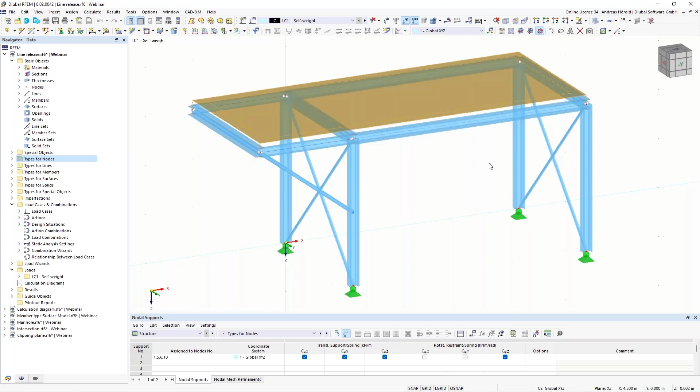When I go to the eccentricity, you can see there's an automatic offset, and I defined that the bottom of the concrete slab is at the same place as the top of the steel structure, member number 18. This is member number 18.

To see it better, I go to the navigator display, then solid model surface is now filled, including thickness. I'd like to display it without the thickness.

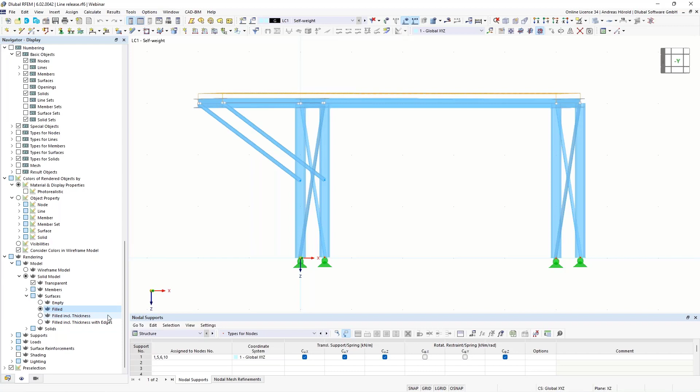So the target is that when I assign a load in that field here, this area of the slab can take off. This isn't the case at the moment.

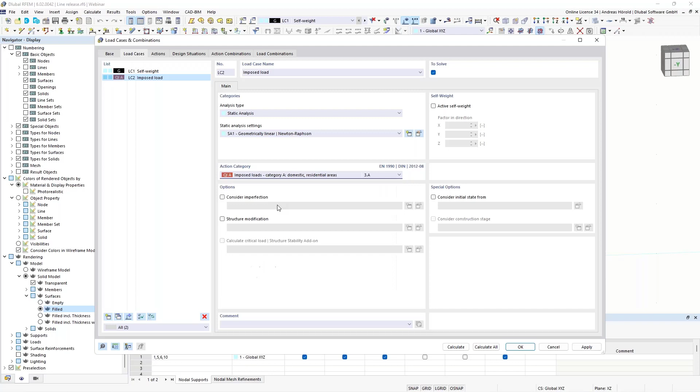Let's try that. I create a new load case imposed load, with the action category imposed loads.

Since it's a full slab here over two fields, I have to define a rectangular load. Left above, insert loads, and then free rectangular loads is the feature that I use.

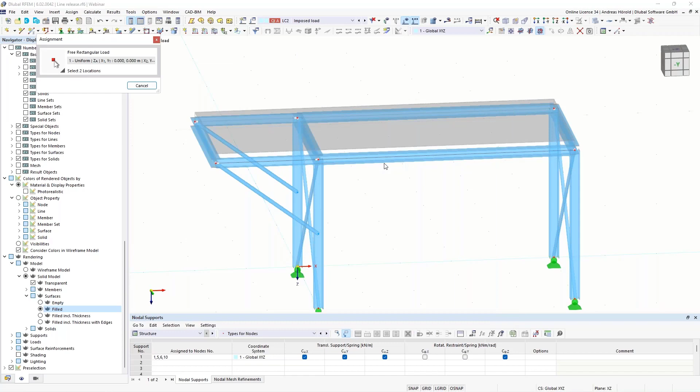So I select the slab. Then a quite high load, 20 kilonewton per square meter, and I define the edges. That's all.

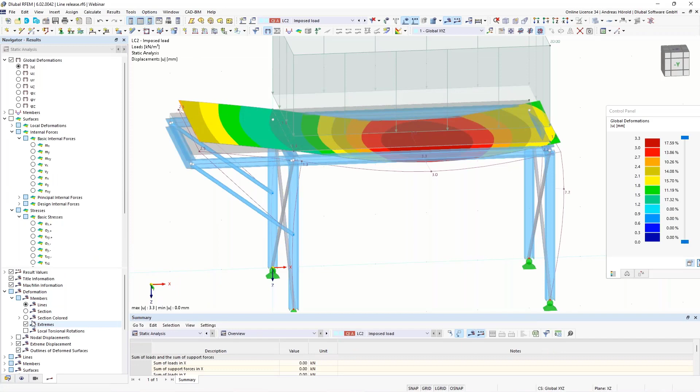So I calculate the load case, and you will see that the concrete slab can't take off. I displayed the sections colored, and you can see that the slab doesn't take off in this area.

How to do that? With a line release. So insert, special objects, and you can find the nodal releases, line releases, and surface releases here. They act the same way, and I use the line releases in this example.

I use the line releases in this example since they work simultaneously or similarly. I select the lines, all the lines into place, and I release surface number 1. It's only one surface, and I have to define the line release type.

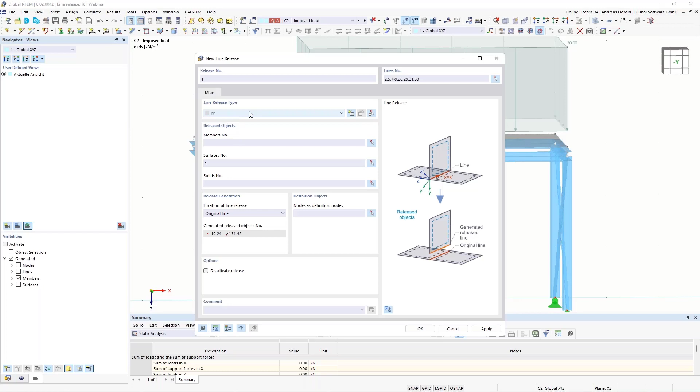In the first step, I release the z-set direction, and I use this nonlinearity, fixed if positive z-set. That means if the load is in the plus Z direction, it is fixed, but it can take off if the load is in the minus Z direction.

Let's try that. We calculate the load case again.

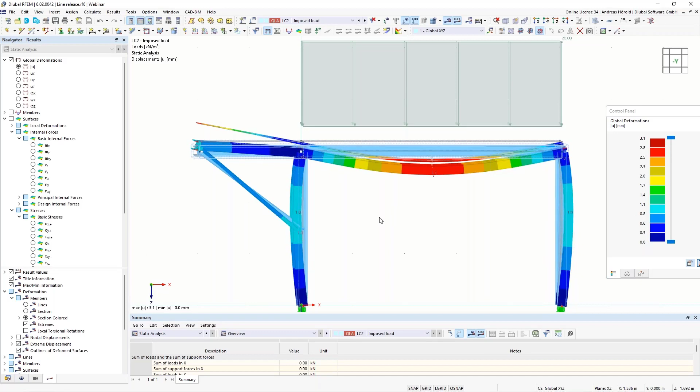So now you can see that the concrete slab takes off. But in that area, the beams act as composite beams because of the eccentricity of the concrete slab. At the moment, we have a deformation of 3.1 millimeters. And when I release the slab in direction X and Y, we will get a higher deformation. Then the concrete slab lies loosely on top of the steel structure.

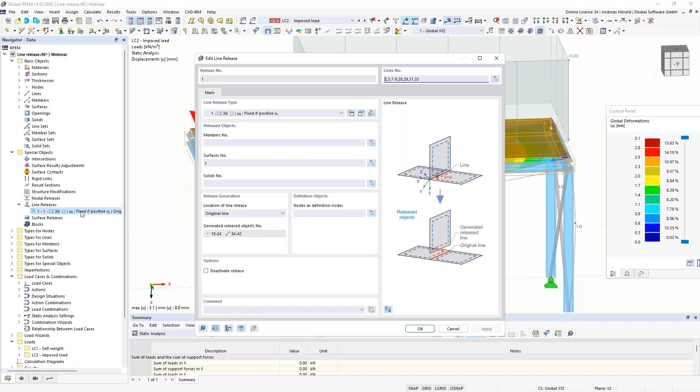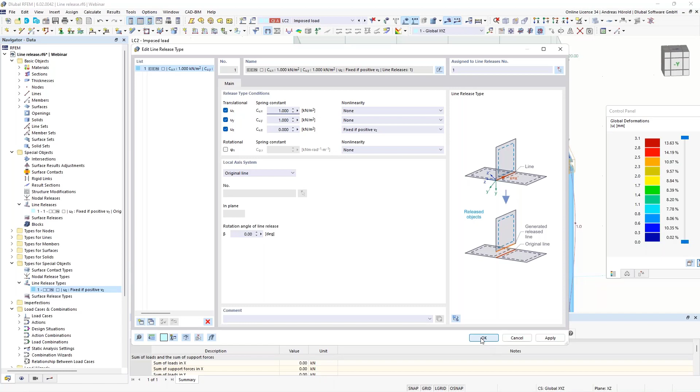So in the navigator data, under special objects, you find the line releases, and you can double click on it, or you can search for the types for special objects, and double click on the line release type, and then the same dialog opens. Then I release the concrete slab in the Y and X direction, but I have to enter a small spring so that the slab can't be moved, otherwise it would be unstable, if it were 0.

We had a deformation of 3.1 millimeters. Now they aren't composite beams anymore, and that's why we get a higher deformation of 5 millimeters.

Okay, then we turn back to the PowerPoint slide.

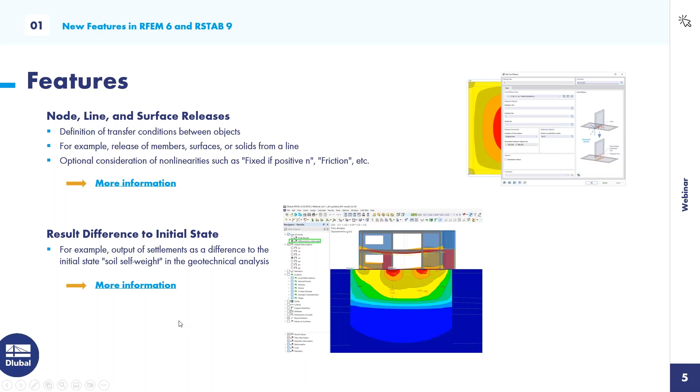Next feature, result difference to initial state. That is useful. This feature is also useful, for example, if you would like to consider the soil self-weight as an initial state in the geotechnical analysis. We showed that feature in the latest webinar about geotechnical analysis. You can find it on our website.

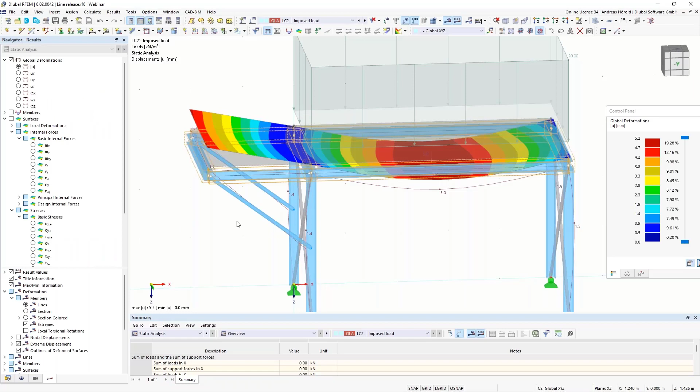So next features, small but I think good features: the zoom with window using the right mouse button, or the animation of deformations. I showed it in the program. If you click with the right mouse, then you can zoom in here. I don't use this feature because I have a scroll wheel, and I can zoom in and out with the mouse wheel.

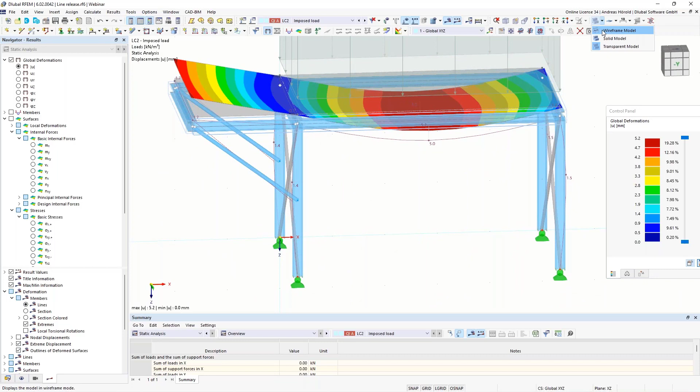I switch to the wireframe model. You can select objects by pressing, or select more than one object with the control key. I hope you see the plus on the cursor. And with the shift key, you see a minus, and you can exclude it from the selection.

So, double click on an object and you can edit it, or right click to open the context menu. And if you select anything, and press the control key, then you can copy those columns here, and without pressing the control key, you can move them via drag and drop.

Okay, that should be all for the mouse functions. Here under the load cases, you can animate the deformations, also with colored sections.

Then we turn back to the PowerPoint slides.

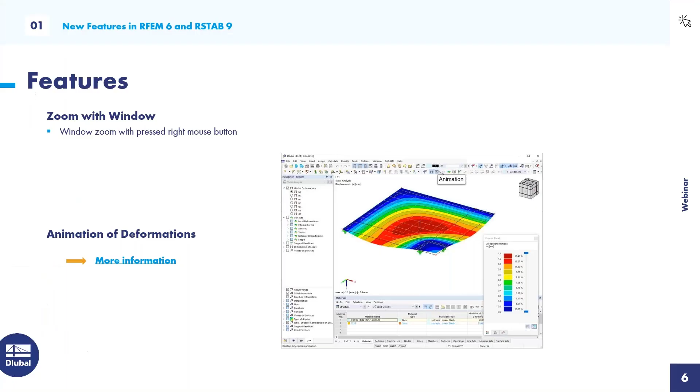Next feature, save as version. You can save different model states within a model. You can define an automatic save, and adjust the cycle. I showed it also in the program.

File, save as version. And when you open the base data, also on the left above, then you can find the register history, and you can find that saved version. I've already got some saved versions because of the German webinar. You can add comments, for example, a completed steel structure or a completed model without loads, etc.

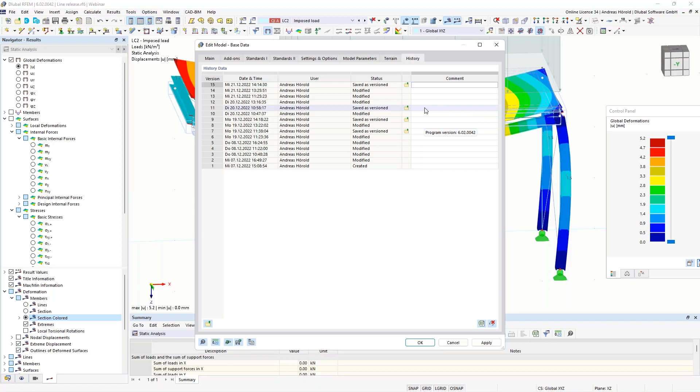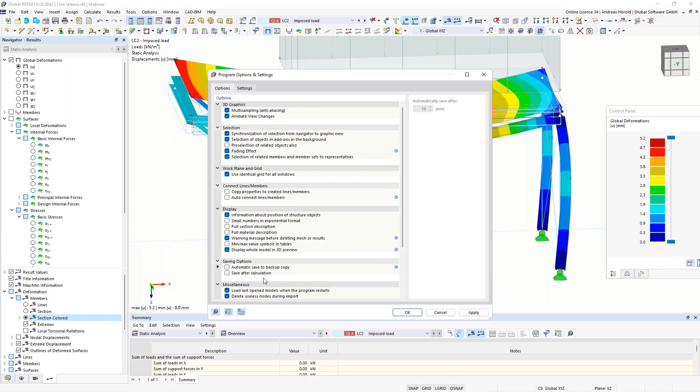Okay, and under options, above, program options, you can find the automatic save function, and you can adjust the cycle. It's also possible to save after every calculation.

Okay, then next feature: displaying result values on ISO lines, for example for deformations, internal forces, stresses, and so on. I can show that also in the program.

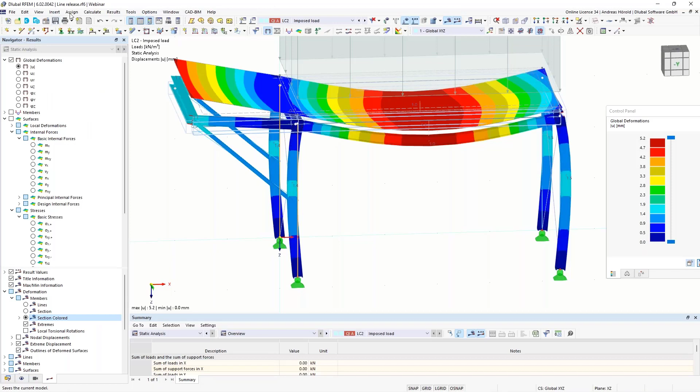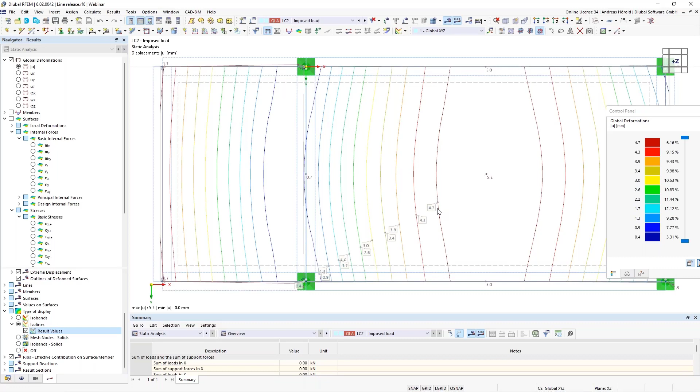We change the view, set direction. And when I scroll down to the isolines and the result values, then you can see the isolines and the result values. It can be quite a good feature when you document pictures in the printout report. The same is valid for internal forces and so on.

Okay, also another feature, I change to the isometric view, is the perspective camera. It was wished for by several users, and we implemented that. It was already there in RFEM 5.

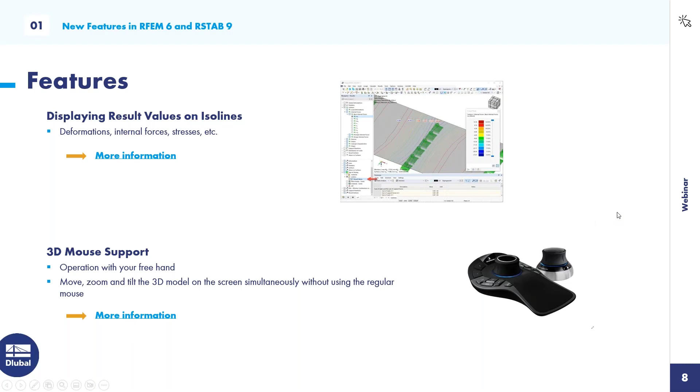Okay, then next feature is the 3D mouse support. You can operate with your free hand. I don't have a 3D mouse, that's why I can't show that, but I would like to mention that feature. Anytime you can find more information when you download the PowerPoint slide and click on the link. At the end of the webinar, I'll show you where you can find the slides.

Then creation of calculation diagrams. You can represent relationships between different results, for example stress strains, internal forces, deformation, etc. I would like to show that with another model.

A simple column fixed at the bottom, and on the left side in the navigator data, where the calculation diagrams are. I already created two diagrams. Now, for example, for the static analysis, the increment, maximum deformation, and you can see such a diagram. It's non-linear because I use the large deformation method.

So that's for the static analysis, and this diagram is for the stability analysis. I create another diagram where you can see the options on the horizontal axis. There are different types: members, global deformations, member strains, etc.

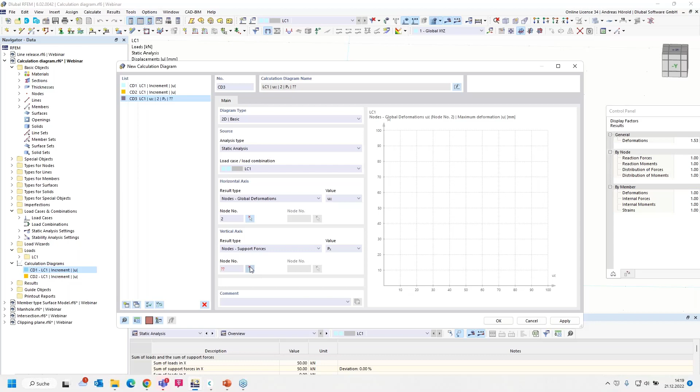I use nodes, global deformation, UX, and the node at the top. And I use here nodes support forces, PX, and the node at the bottom. And then you get such a diagram. Okay, that was wished by a lot of users.

Then turn back to the PowerPoint slides. Changing node types: you can adjust the type and location. I would like to show that also in the first model.

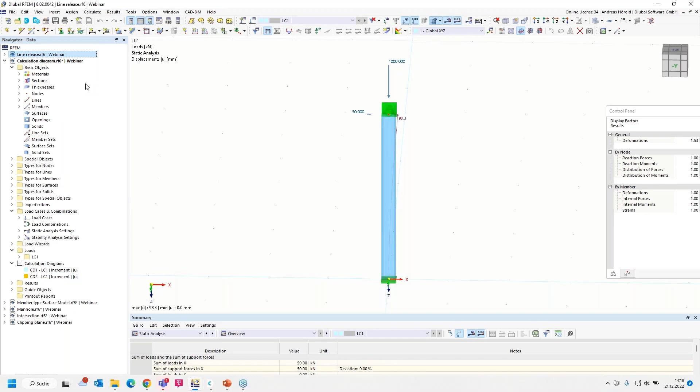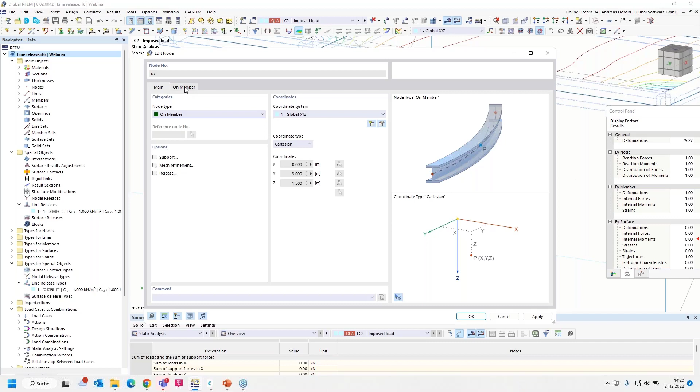Now, for example, for this node, when I double click on it, you can change the node type, for example from on member to standard. You can add supports, mesh refinement, releases, etc. And you can change the distance between the two nodes. For example, I can change that from 50 to 20% and apply that. Okay, and the node has been moved.

I undo that. Okay, then PowerPoint slide. Next features.

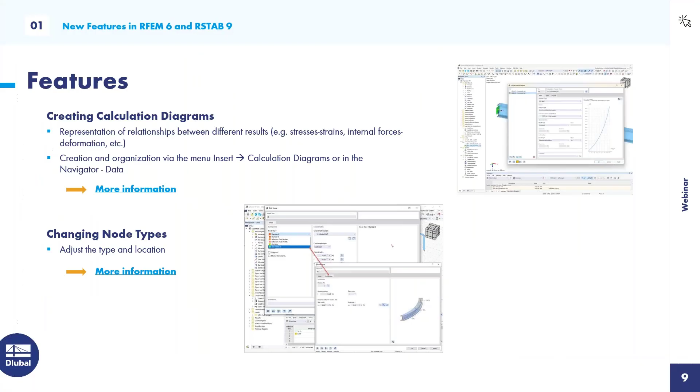A quite powerful feature: the member type surface model. You can simulate openings in webs. You can consider the real stress distribution, and you can use the member results in the add-on. You can use it for castellated beams, perforated beams, beams with rectangular openings, Vierendeel trusses, etc. I would like to show that in another example.

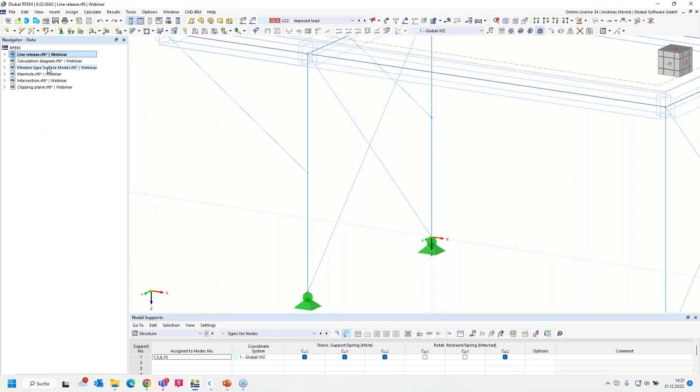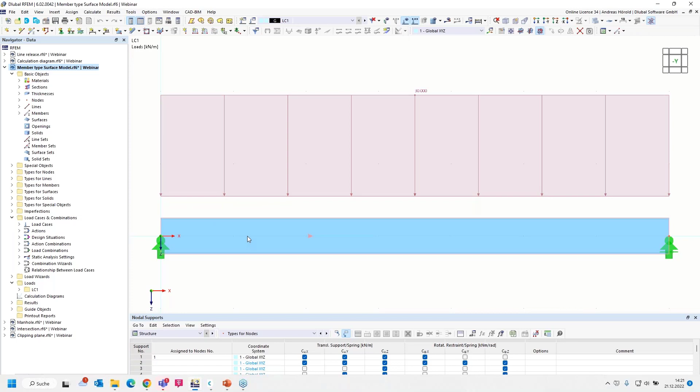I've already prepared a single span beam. The cross section is an IPE 500, and I would like to add holes here, or openings. So that's why I double click on the member and change the member type to surface model. And I select here member openings.

A dialog was added, member openings, and I define the openings. There are three reduction types: rectangle opening, which you can see here in the preview, the circle opening, and the hexagonal opening. So such a typical castellated beam is displayed here in the preview.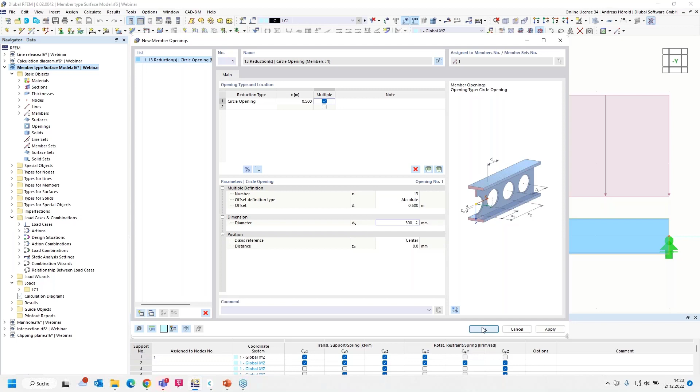I select the circle opening. I start at 0.5 meter, and I would like to add more than one opening: 13 openings, and the offset can be absolute or relative. If relative, you have to enter % here, and I choose absolute. The offset should be 0.5 meter, and the diameter 300 millimeters. Okay, I apply that, and you can see the circle openings.

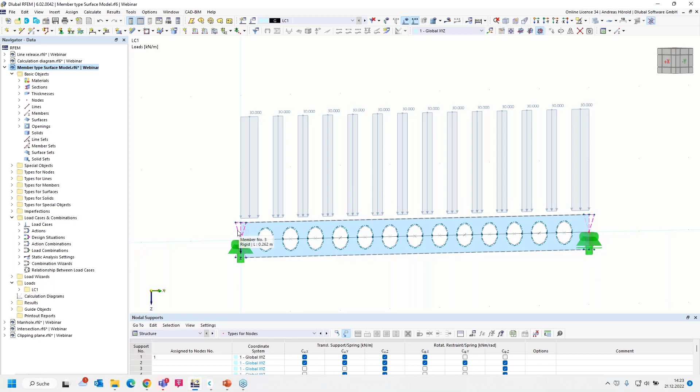Right above, there's a new button, and you can switch between displaying the surface model and the normal model. So you can see rigid members here that connect members, for example, if you want to consider such a model in your complete member model, the stiffness, for example, of such a member or something like that.

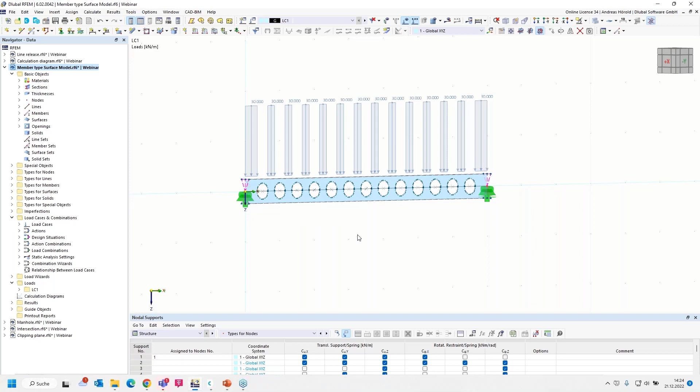So you can see that the load has gaps. I entered the load in the middle of the beam, and I would like to correct that there are gaps. In the navigator data, where are the loads? You can see the new line load and the member load, and both are still connected. If I change the member load, the line load will be changed.

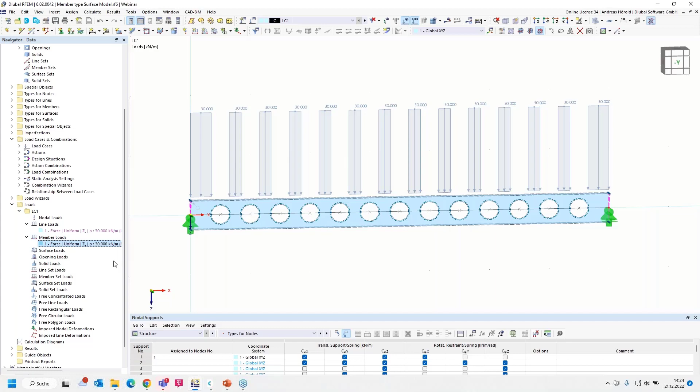So I double click on it, then I select eccentricity, and under force eccentricity, I select the top of the member for the load. Okay, and now you can see the member load and the line load.

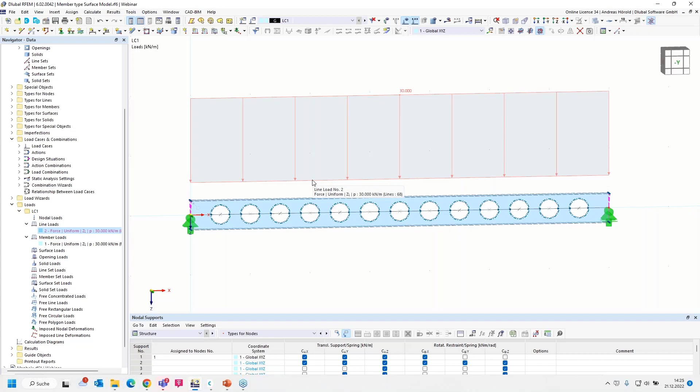And the line load acts on the line number 68. You can see that in the preview. And this line is line number 68. Okay, that's correct now.

So then we can calculate, or I have also defined a design situation now with only one load case, but I use that design situation.

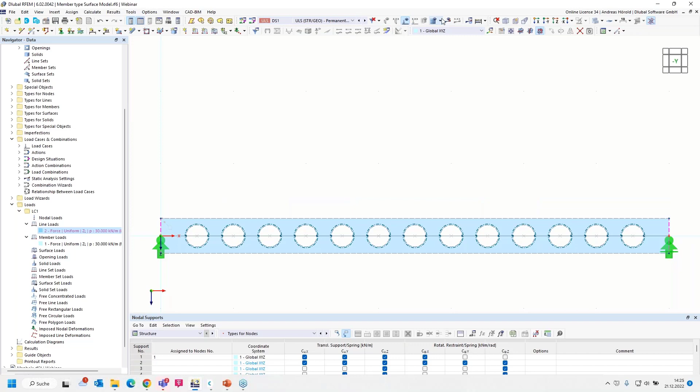So, and now you can see, for example, the surface stresses, basic stresses, principal stresses, and so on.

And if you want to do a real design, then you have to go to the base data and activate the add-on stress strain analysis. And I change the settings of the stress strain analysis. I select only the surfaces for the design.

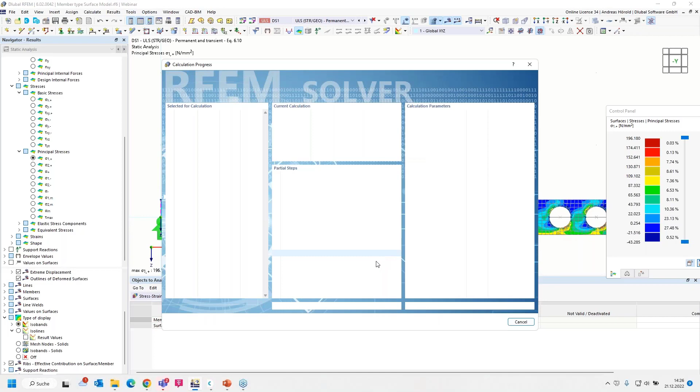And now you can see also a stress ratio, the different stresses, sigma eq v max von Mises, for example. Yeah, that's a normal stress analysis.

If you want to do a stability design, you have to activate the add-on structure stability, and with the eigenvalues, you have to define imperfections and assign that to the structure and do a stability analysis. But for such a stress analysis, we would be at the end. Okay, that should be all to that feature.

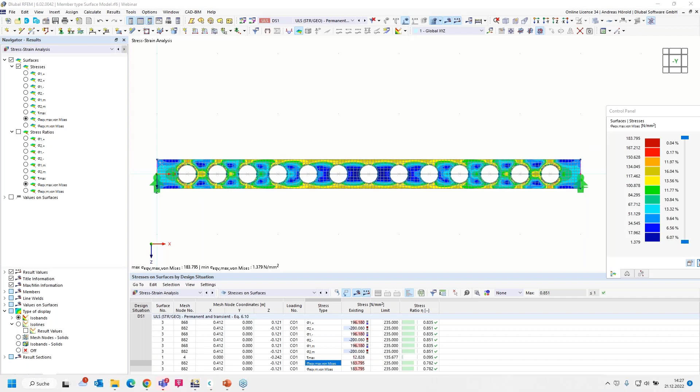Next feature is plastic hinges according to FEMA 356, and it's possible to create pushover curves with that feature. In the future, we will implement the new add-on pushover analysis. I will mention that in the prospects.

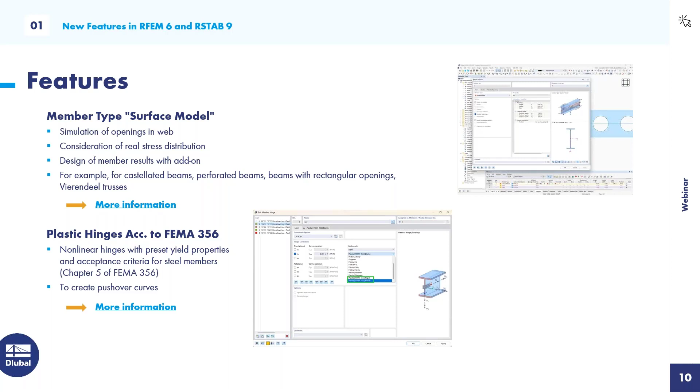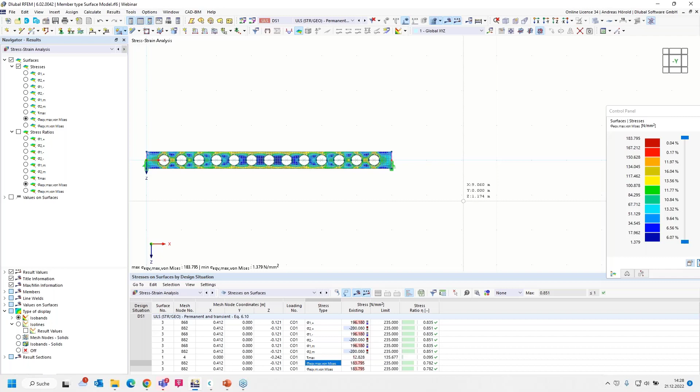Okay, next feature, dividing surfaces with intersection lines. That's quick to show. I create this simple rectangular slab. Doesn't matter what materials it has.

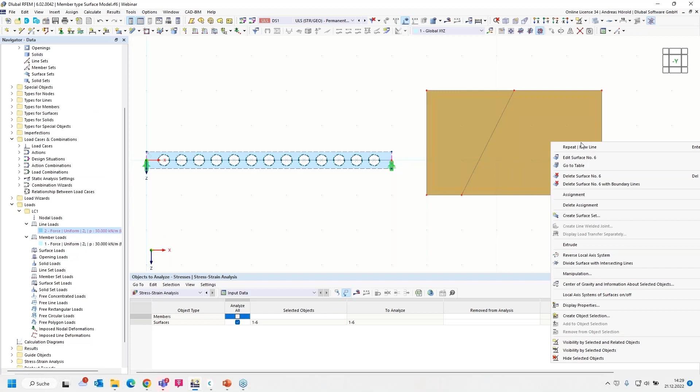Then I draw a line. So it's still one surface, but when I right click and select divide surfaces with intersecting lines, now I have divided it, and now those are two surfaces.

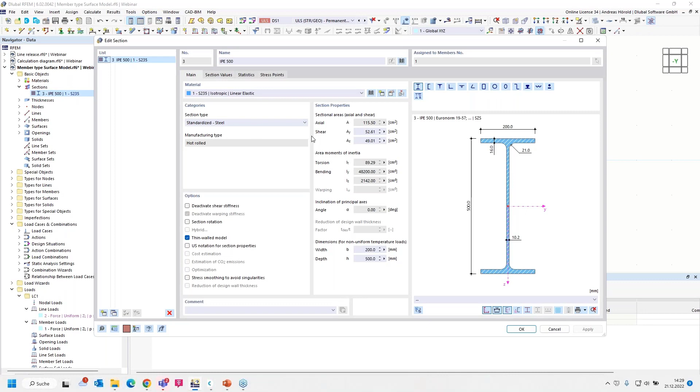Okay, then next feature, accessing the manuals chapters with the F1 key. It's also a powerful feature when you need help. I go back to the program. For example, that's the cross section, and you can go to any chapter here or any dialogue.

And when you press, at the bottom, the help button, or you press the F1 key, then it moves to the stress points, to the chapter that is connected with the dialogue. Okay, that's all to this feature.

Next feature, intersection of curved surfaces and solids. There's a new surface type, trimmed for the intersection of curved surfaces, for example for pipe penetrations, twisted openings, and so on. And for the solids, there are two new types, hole and intersection. You can use it, for example, for complicated construction pit shapes, perforated solid shapes, and so on. I would like to show those two features in the program.

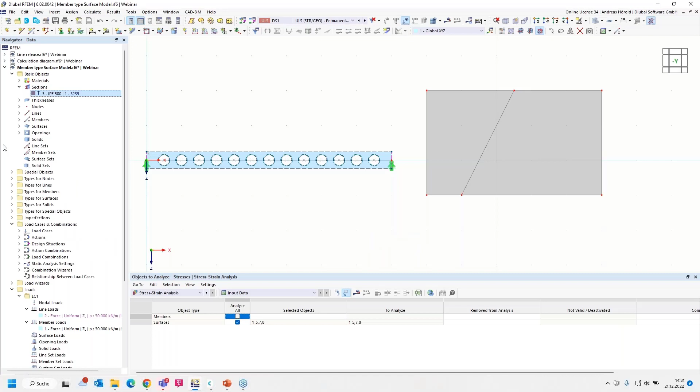I start with the second feature, with the solids. So next model, manhole is the name. I created 4 different solids. I can open them in the navigator data. 4 cylinders, using different materials: concrete for the manhole that I would like to create, and those solids are from steel.

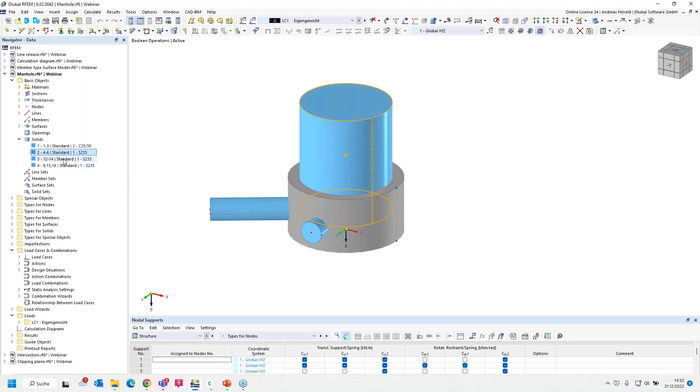And if I want to use Boolean operations and subtract those solids from this solid, I have to select the 3 solids, then right-click and edit the solids, and select the solid type hole.

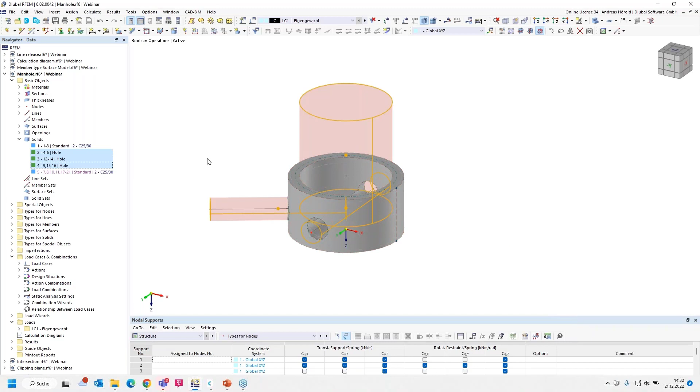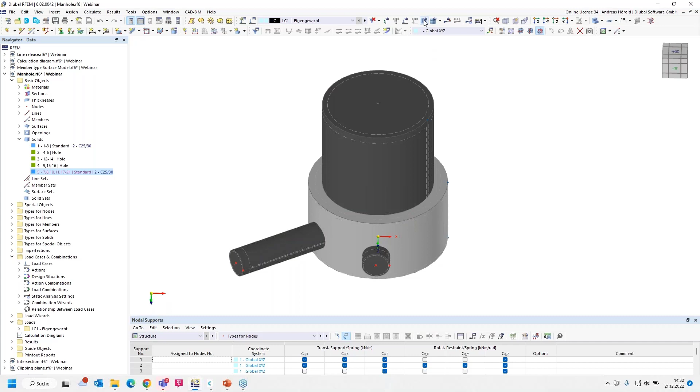And now the 3 solids are subtracted from the first solid, and that's the manhole with openings for pipes, etc. Only a simple example to show that. And with this button above, you can switch between different display options.

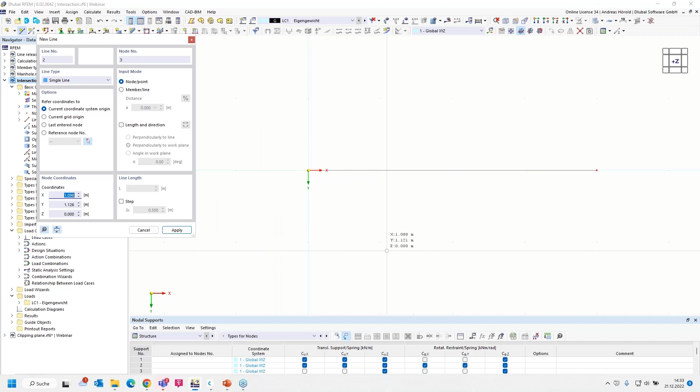Okay, next model for the intersections. It's an empty model. I draw 2 lines, so, okay, such a crossing. And I enter pipes. The thickness of the pipe actually doesn't matter, but I change it to 5 millimeters.

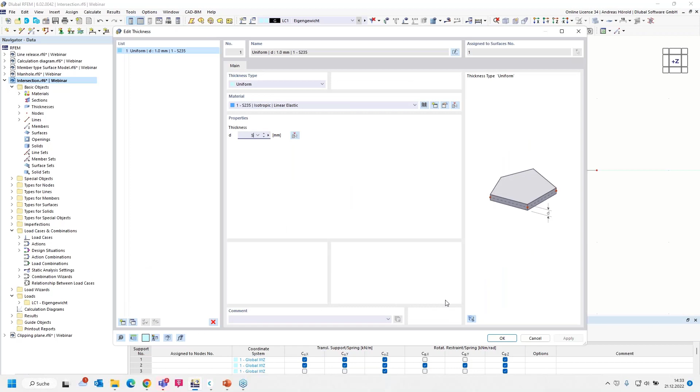And select under the dialog pipe the radius, or define the radius 20 centimeters. The first pipe is created. With enter, I go back to the dialog and define a radius of 15 centimeters. So there are 2 pipes, but they are not connected.

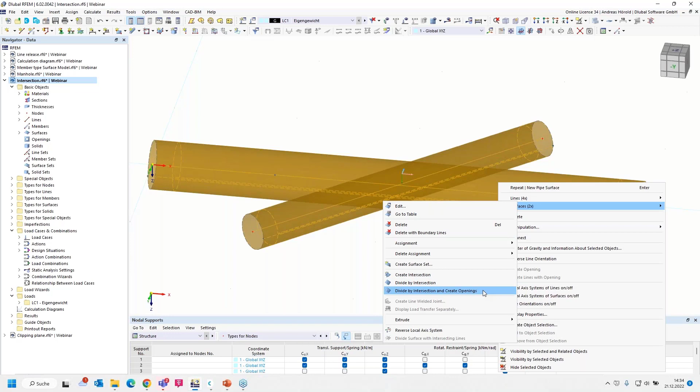When I select them and right-click, I open the dialog, and under the surfaces you can find the options: create intersection, divide by intersection, and create openings. I select the middle feature, and you can see now there are intersections with different components. On the left side in the navigator data under surfaces, you can find the different components, and they are trimmed. I click through the single components.

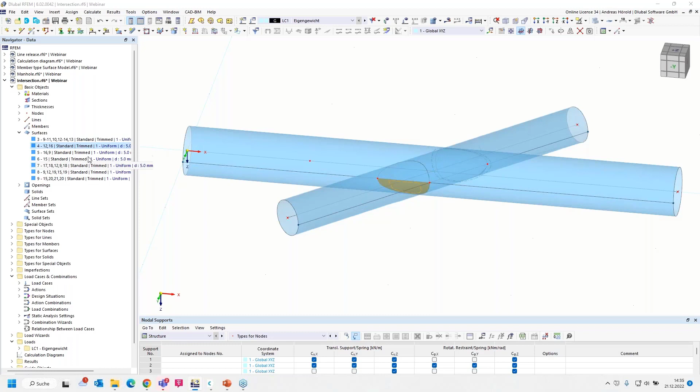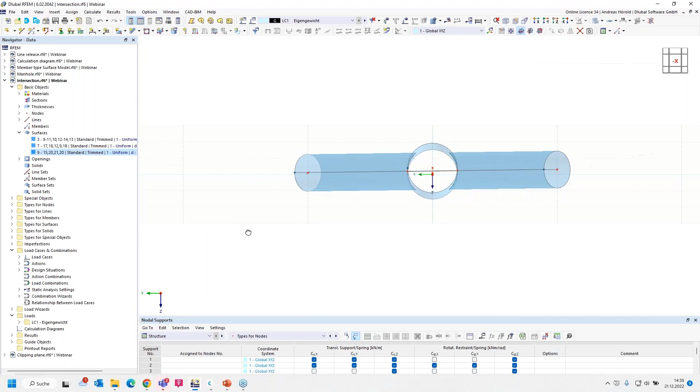So, and I select those components that we don't need. With the Control key, I can select more than one surface: this one, not this one, but this one, and not this one. And I delete them. Now we can take a look through the pipes, and that's the intersection line here, a NURBS line. Yeah, and the pipes are now connected.

Okay, then we turn back to the PowerPoint slides. Moving the clipping plane is also a good feature to evaluate your results. I go back in the program.

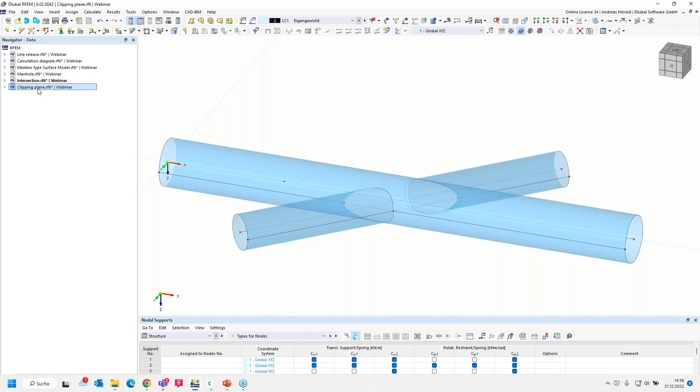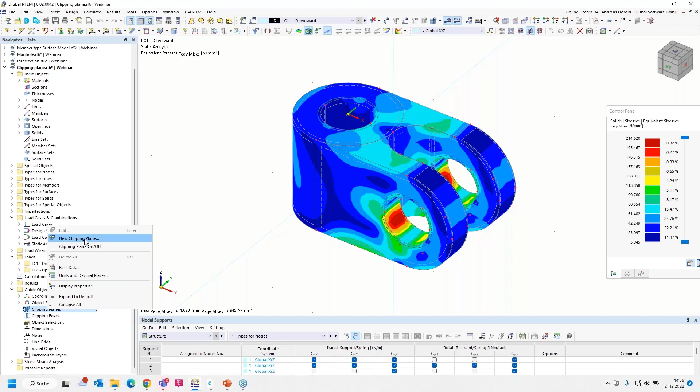So it's good to show on such a solid model with results. And under guide objects in the navigator data, you can find the clipping planes. By right click, I can create a new clipping plane. There are different types for the clipping planes: 3 points, angle, and so on.

I like the offset because I only have to select 1 point in the model and define the plane. Set, for example, and I press OK and set active. And then that's the new feature: you can move the plane with such a point here on all edges.

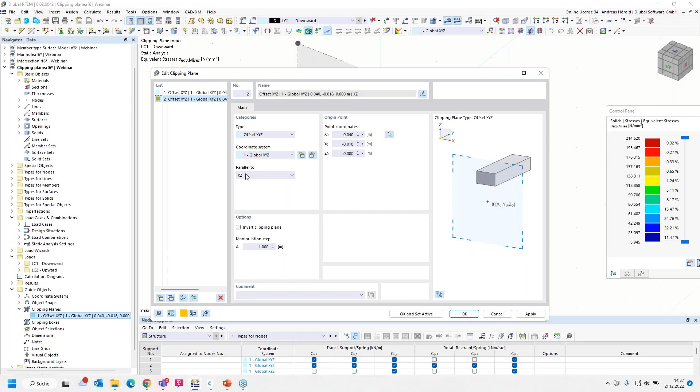You can copy that clipping plane and only change the plane, so you've got the same feature. As I said, it's a good feature to evaluate your results.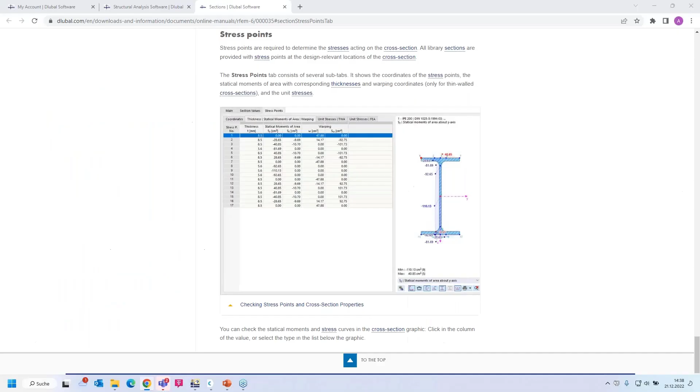Okay, then to the next feature: assigning types in the graphic. You can assign nodal supports, effective lengths, line supports, and so on. It's a longer list, which you can find when you click on that button here.

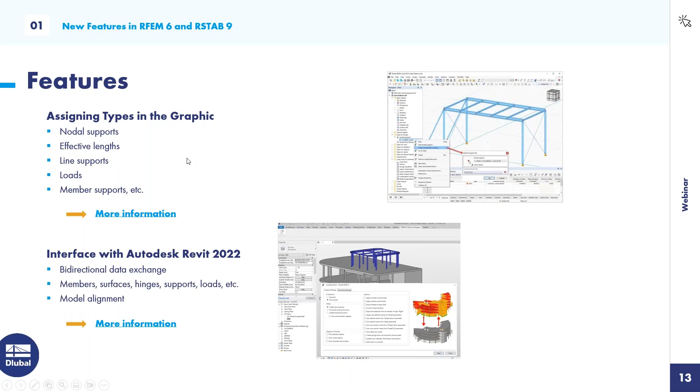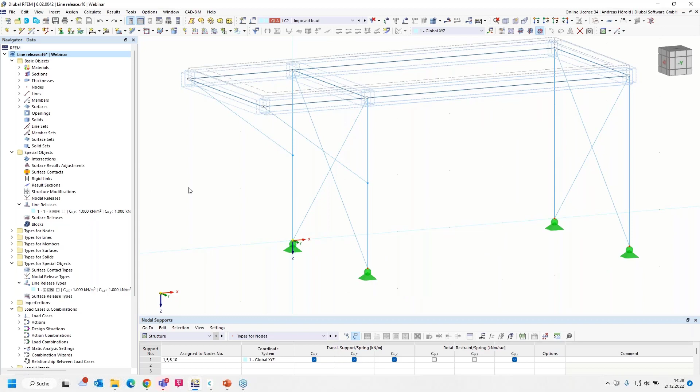I would like to show that feature, for example, with nodal supports. I go back to the program, for example, in the first model. When you want to add such a support to different nodes, you can find the types for nodes, nodal supports, and then by right click you can select assign to nodes graphically. For example, you can add them here quickly.

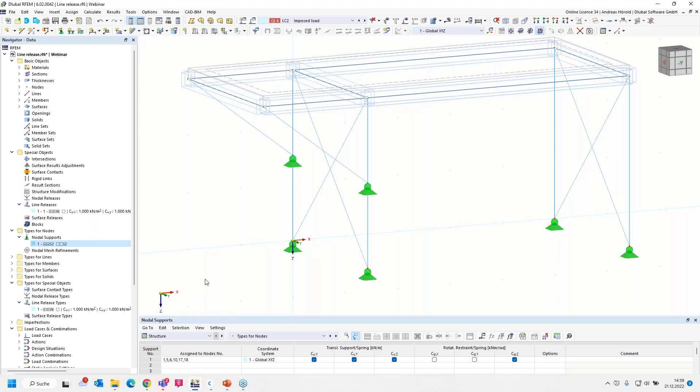Yeah, it is a good feature, I think, maybe better for other components such as effective lengths also.

Okay, next feature is the interface with Autodesk Revit 2022. The bidirectional data exchange is possible. You can transfer members, surfaces, hinges, supports, loads, and so on, and you can update the model in the other program.

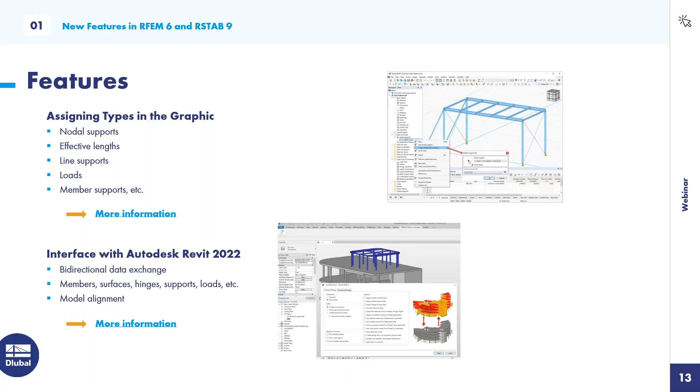Okay, that was all to the general features in RFEM 6 and RSTAB 9. Now I would like to introduce some features of the add-ons and the standalone programs, not in the programs, only in the PowerPoint, because it's not interesting for everyone.

For RWIND, the freely adjustable wind permeability for surfaces has been implemented. That's, for example, for permeable scaffolding, dust curtains, mesh structures, and so on.

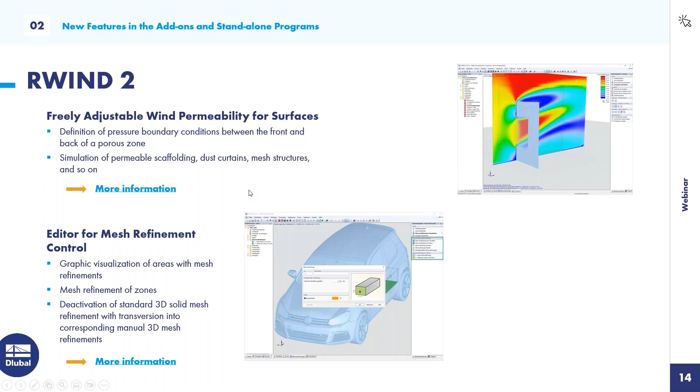Then use the editor for mesh refinement control. Other new features are the load factors for zones, point clouds, new auxiliary objects, and so on. In the webinar two weeks ago, we presented all those features, and if you click on that link, you can watch the recording and see all the new features.

For RSECTION, we also have interesting features. You can create elements automatically from a DXF file, or you can use DXF template lines as center lines of an element with a defined thickness. For example, when you see that cross-section here...

Imagine you have center lines as in DXF, then you import the center lines and only define a thickness of, for example, 2 millimeters. Then, with one click, such a cross-section is created.

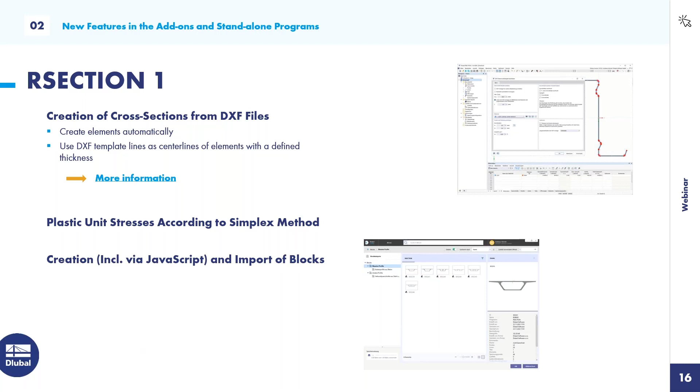New feature: plastic unit stresses according to the simplex method, and the creation and import of blocks in RSECTION. The creation is also possible via JavaScript.

RSECTION and steel design add-on: new is the mode shape, or the graphical output of the mode shape for distortional, local, and global buckling, also for RSECTION cross sections, and it's also a feature of RSECTION for library cross sections.

New in the steel design add-on is the designing of cold-formed steel members according to EN 1993-1-3. It's valid for cold-formed sections from the library and for general cold-formed sections from RSECTION, but not for perforated sections.

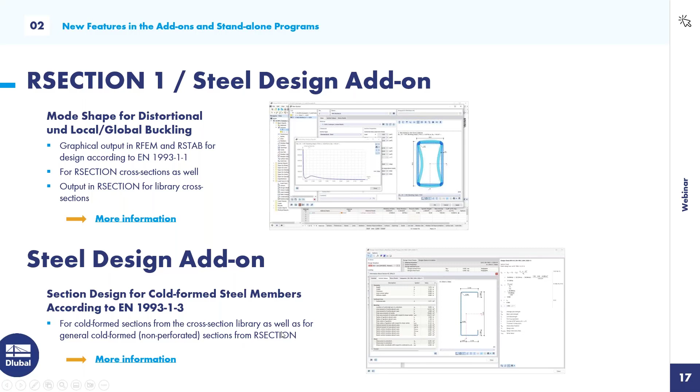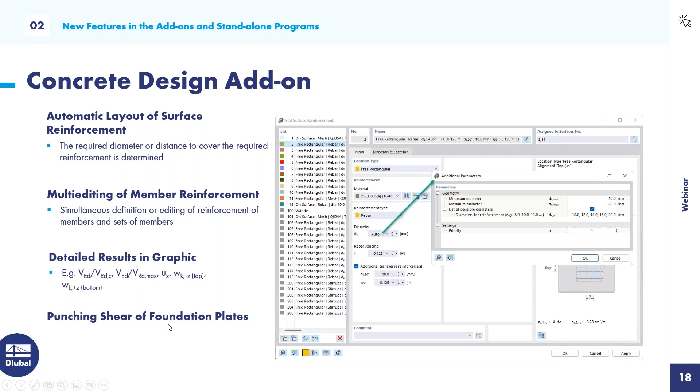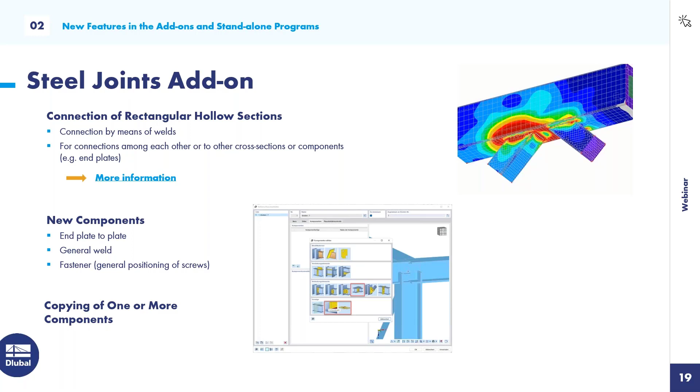That's a feature we already showed in the latest webinar of the steel joints add-on some months ago. You can find it also on our website if you are interested in the steel joints add-on.

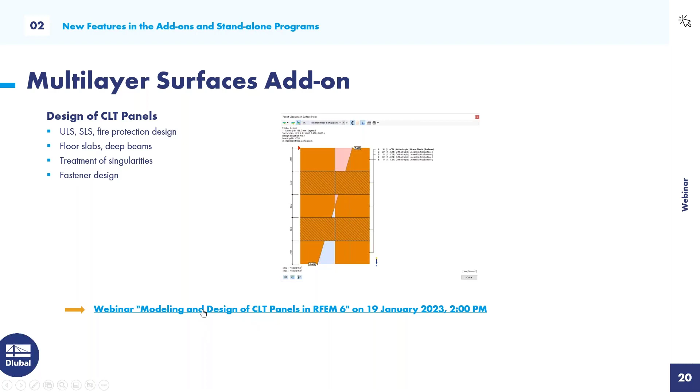We would like to show all those features in the webinar Modeling and Design of CLT Panels in RFEM 6 on the 19th of January next year. Bastian Kuhn will present it, and you can already register when you click on that button here.

The last feature of the add-ons and standalone programs is the improved segmentation for deformation analysis. It's valid for, or you can use it in, the timber design and concrete design add-ons for automatic segmentation for deformation limits, cantilevers and single span beams.

Okay, that should be all for the features in the add-ons and standalone programs. Now we turn to the last point for today: the planned features.

We will update the interface with Autodesk Revit to version 2023. Then we will implement the interface with Tekla Structures, and it's also planned to implement load transfer. You can transfer the load from another model, and both are digitally linked, meaning you can transfer the support reactions to the next model and assign it as load of the structure.